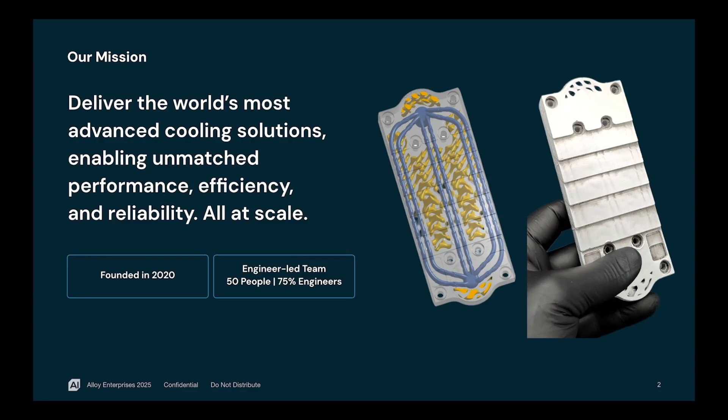We were founded in 2020. We're a 50-person team, about 75% of us are engineers, and we're based in Burlington, Massachusetts, just outside of Boston. You're more than welcome to come by if you'd like to see the things in reality, but you'll see them here today too. We basically own end-to-end design, manufacture, and delivery of parts for customers with thermal management requirements. Like a lot of people here, you guys are smart engineers doing great things, but sometimes people have problems and don't know how to solve them, and that's where they come to us, especially on the thermal management side.

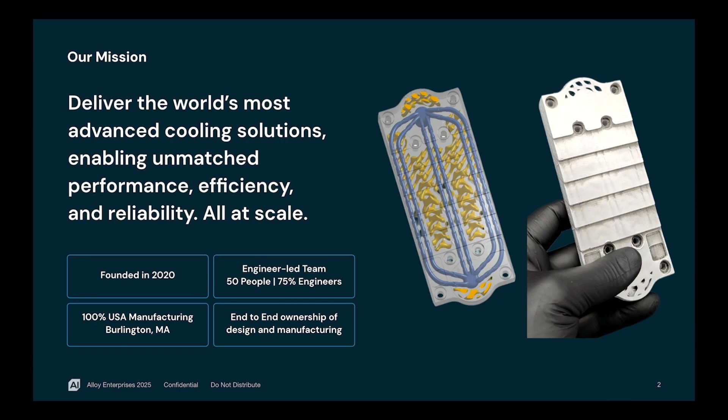There are some tools that you guys are using every day that are causing thermal management headaches for people in the industry. So specifically, I'm going to talk about thermal management with liquid cooling, single phase, with a fluid. There's a bunch of ways to deal with thermal management, but we'll talk about why we're focused on liquid cooling.

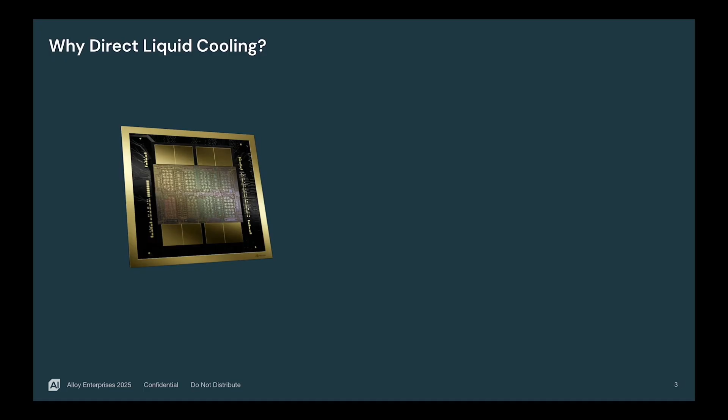The big one here is this NVIDIA Blackwell chip, the B200. For some folks, this is making my life easier in terms of emails, homework, writing essays, maybe even some talk tracks for presentations. This is an NVIDIA B200 chip, and it is powering the AI revolution we're seeing today. Trouble is, it gets hot.

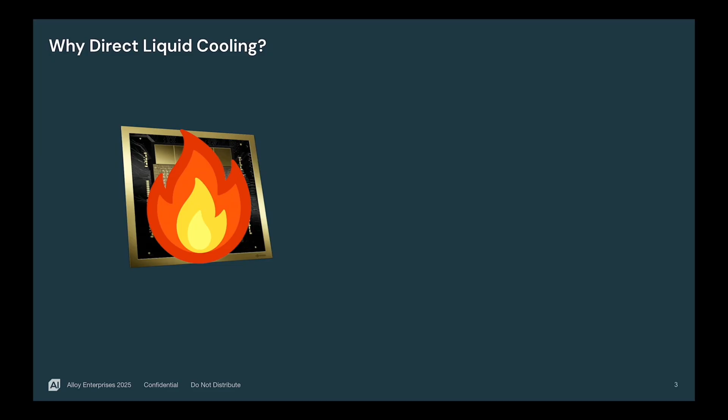If you're a chip designer at NVIDIA, I'll share some personal thoughts: I think maybe the chip industry didn't really think about all the implications of putting a lot of transistors in a very tight space. This chip is about a 50 millimeter by 50 millimeter package, and it can produce quite a lot of heat, we're talking thousands of watts. So what we need to do to mitigate that heat is cool it.

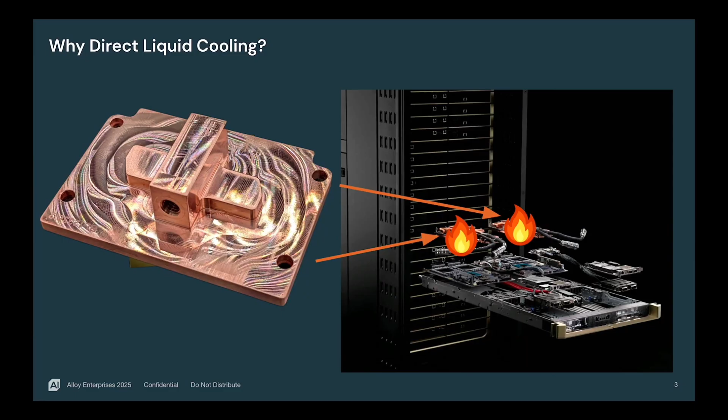One rack is part of a whole bunch of racks, and it's all getting really hot. We need to talk about this increasing demand. You're seeing about a 33% increase in compounded annual growth in terms of thermal design power, or what we call TDP.

The chip manufacturers are trying to respond to this, and I would almost say they're kind of late to the game. They're trying to produce parts that deal with this thermal problem, and everybody's kind of scrambling to figure it out.

And then more importantly, there's a whole ecosystem, not just NVIDIA. There's the people that make the motherboards, the people that make the racks, the hyperscalers. All these people are having to deal with thermal management at different levels.

And the key here is, remember we talked about that 50 millimeter by 50 millimeter package. So today's market is 1200 watts. They're talking about next gen chips up into the 3600 watt category.

I'm old, I finished college in 2000, so I still had incandescent light bulbs. There's a 100 watt light bulb, I think of those, and that's like 50 of them all kind of in one spot, this little tiny area. And just one light bulb could be pretty warm. If you're a kid in elementary school, you had a little chicken coop, and one light bulb kept all the chicks hatching and growing.

So now figure 50 of those in that small space, and then you multiply that by like 8 of those on a motherboard, and then a whole bunch in a rack. It becomes a big problem.

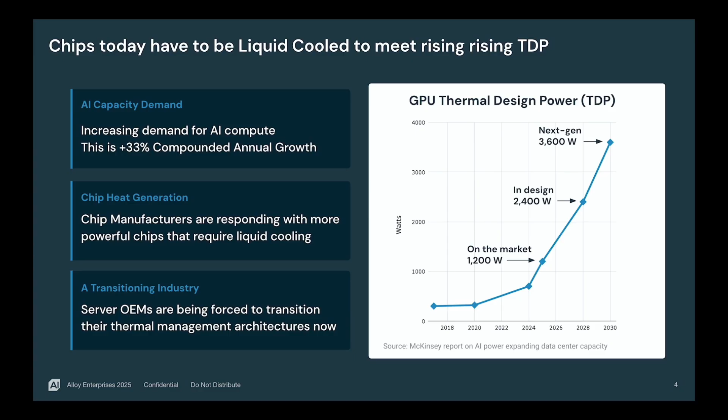So one of the things that we do, we provide value in a couple different ways. The key is, we talked about that end-to-end ownership, and we have basically a whole library of geometry that we can put into a part through the design. Then we can iterate on those parts. That would be our computational design piece, where we have some folks here. You can see we have nTopology here. We also use a number of other tools to design, and those things are actively iterating.

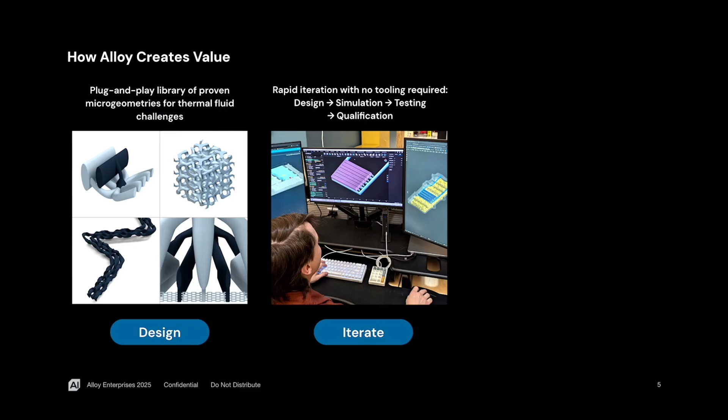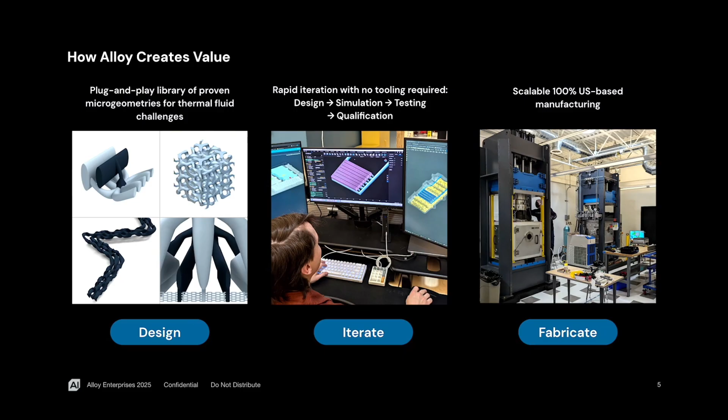And then ultimately, we have fabrication. So when you can do the design, you can iterate, and then you can fabricate so that your process is optimized. That becomes an ideal situation. And I'll talk about some of our process and how we own that on the manufacturing side.

So a couple key things though is that for our data centers, from a direct liquid cooling standpoint, we can provide thermal management with low pressure drop.

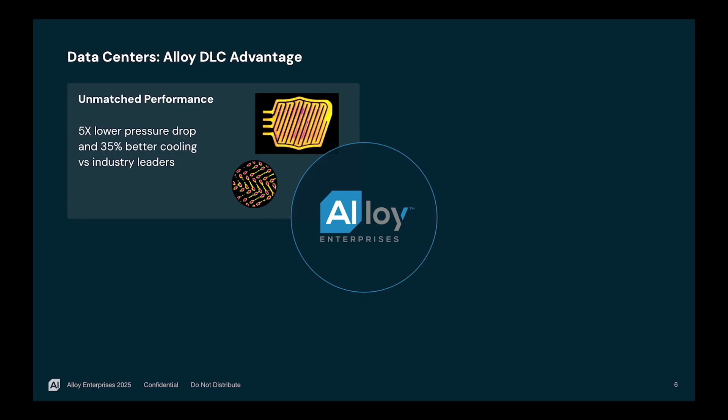And if you're not familiar with pressure drop, that is when you're passing fluid through a passageway, it kind of wants to slow down. And that slow down in flow ends up in a lower pressure. So if you have a pump, that means you have to have a bigger pump the more pressure drop you have. So if you can mitigate that, that's going to be an ideal situation, especially when you're in a space-constrained environment like a data center.

And also in that regard, smaller pumps in this case would actually save you a bunch of power. And then you start stacking up all these GPUs, that becomes an issue.

The other piece here is electronics and water generally don't mix. So we don't want those things to leak, that's a big deal, and you'd be surprised how many of these liquid cold plates actually do leak.

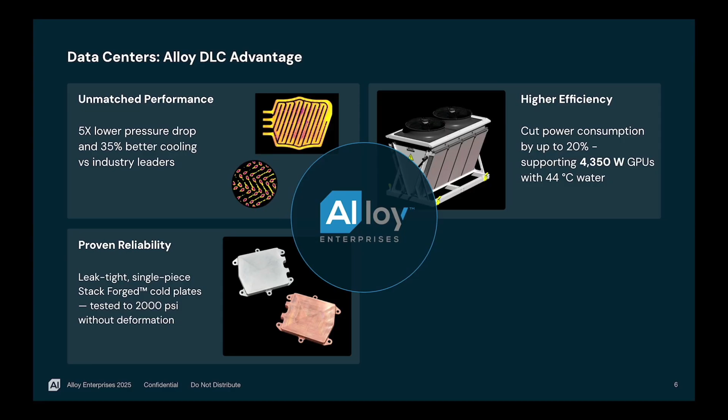The other key here is we do cooling not just in data centers, but in other industries like semiconductor test, high energy lasers, etc. And oftentimes we have to operate in either a high pressure environment or a vacuum environment.

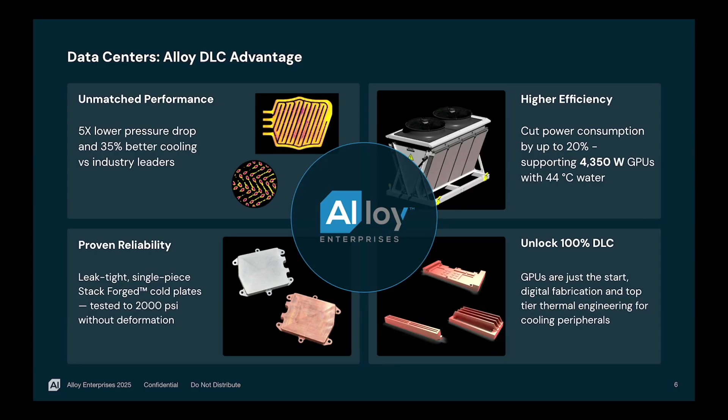And then the other piece here is that GPUs are just the start. It turns out the GPU gets hot, and if you're going to have a GPU with all this throughput, now the memory modules are getting hot, and then all the other peripherals, it just becomes a cascading problem of things. So Alloy is, we'll say lucky or well positioned, that we have a capability that can help across the space there.

So Alloy started in 2020, and the original idea was that we were kind of born out of the additive manufacturing space in Boston. And a number of founders were in companies like Formlabs and other folks.

The idea here was that additive manufacturing, specifically with lasers, is often very expensive, especially in metals. The whole idea was how can we make a low-cost, scalable process that could actually deliver large quantities of parts.

You'll see in number one there, we have a surface prep, but the key here is that we have a coil of metal, in this case aluminum 6061, and we also have a copper 110. So two materials.

The whole idea is after we surface prep that, we go through a construct process. That's basically we take that coil and we laser cut it. We also can apply an inhibition layer with basically a binder jet where we can prevent parts from sticking together, and ultimately we're going to stack those parts together and put them into the third part of the process, which is called diffusion bonding.

We're going to produce that part by adding, in a controlled environment, heat and pressure to form a solid part. So much like limestone, you get sediment layers, and over time that heat and pressure forms a limestone or a rock. In this case, we're forming bonded aluminum.

What's unique about that is that there's no filler materials. So in cold plates previously, brazing is used, where you basically machine a part and then put a solder or some different material together and put it in a vacuum brazing oven, and it forms a solid part where that filler material bonds to both sides.

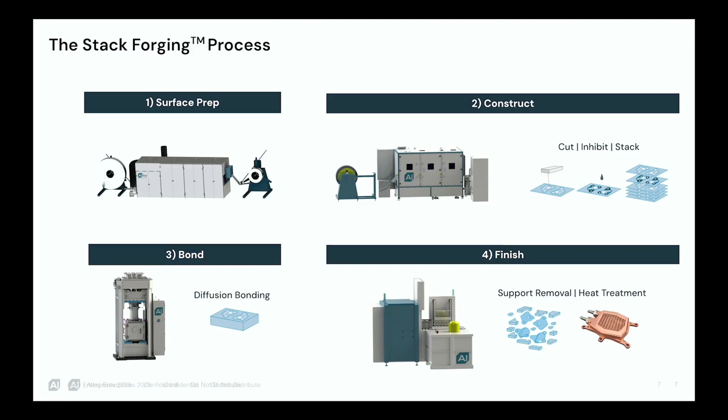We're doing this as an atomic layer, so there's no different materials in there, and often in brazed parts they're prone to leaking, especially over lots of thermal cycles. Then finally we just do a heat treat for that part. For aluminum and copper, it's a little bit different.

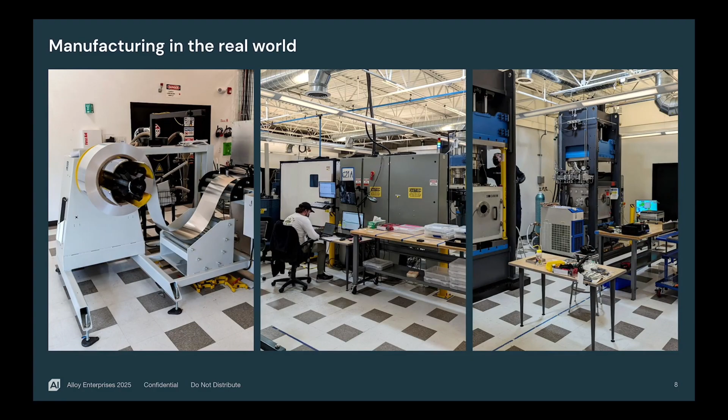So manufacturing in the real world, so we have real parts. That's our surface prep. And then this is our construct machine, and we have bonding machines. So we have five production lines on the cutting side and the bonding side, so we have plenty of throughput to do thousands of parts that you would need for a data center. And we have a whole bunch of certs.

So I'll get on to the fun stuff. That's all boring kinds of things here.

The key here is that there's a bunch of talks about AI leveraging for compute. Some of the things that go in here is that we have heat coming from all of these different parts inside of the data center, or in the server rack. We have it on the GPUs, we mentioned previously the DIMMs, now we're talking about interconnects for PCIe cards and all sorts of other stuff. Solid state drives is another big one. Things that I didn't even know get hot actually get hot, and it's a problem, especially when they're in that space-constrained environment.

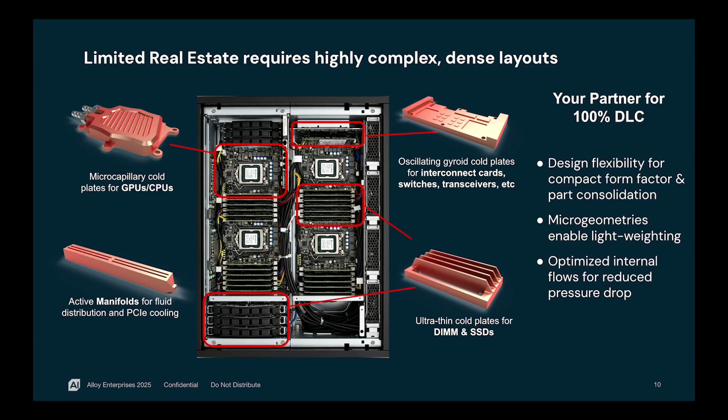Okay great, my video is playing, so that was a big question mark.

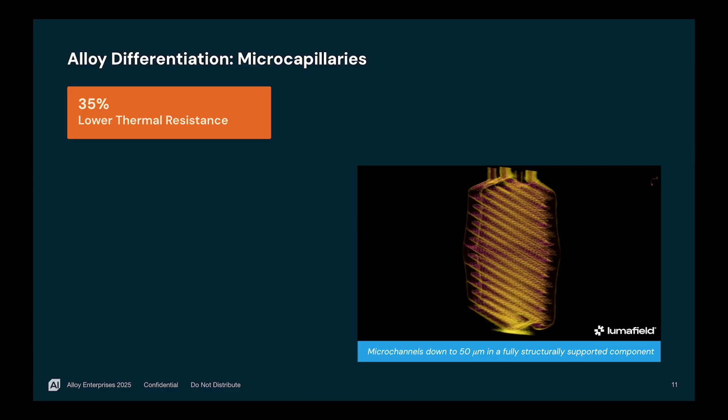Another key here is once you take that pressure drop and heat mitigation, you talk about thermal resistance, and now we have lower thermal resistance. The key here is that we're taking kind of this network or vascular type structure.

This is a CT scan of one of our parts. It's actually this aluminum part that I have here, happy to talk about that more. And then these are actually some sheets associated with the part, so it's just sheet metal. We have multiple layers with different types of geometry that we bring together, and that's where the diffusion bonding process happens to form the solid one.

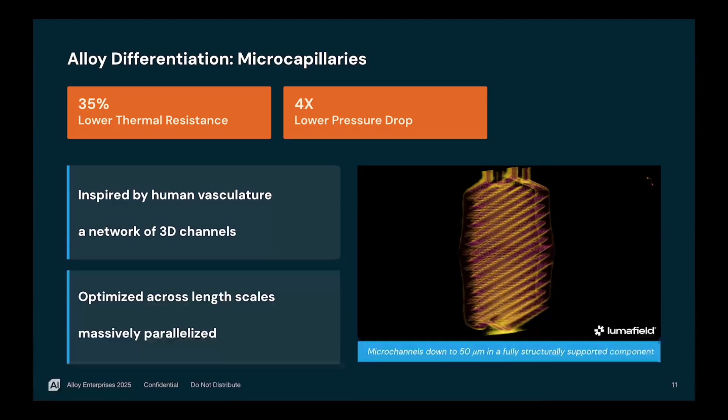What we can do with this layered approach is we can have different types of geometry of different sizes, and that's where our computational design comes in. This is optimized for different length scales. We're going to talk about two areas of computational design: how we massively parallelize the flow, and then how we actually get it to high surface area geometry, which we call capillaries. So that's kind of this next slide of this aluminum part that I showed. We kind of take a multi-tiered approach.

If you look at the center image, we basically have a series of passages that form a network together to bring flow in. The key is, you'd be surprised, as I learned especially in the defense and industrial space where I focus, we get a lot of parts that need thermal management, but they're basically made with gun drilling. They have a bunch of drilled holes, which is a pretty crude way of manufacturing, but it's very cheap, though it can often provide a lot of turbulence and different issues at those intersections.

So one of the things we can do by owning the design and manufacturing process is sometimes just making flow smooth, or making your passageways smooth. Put a nice bend, a nice flow, and that's going to reduce your pressure drop a lot, because your flow is going to be nice and laminar. We'll talk about laminar flow here in a little bit.

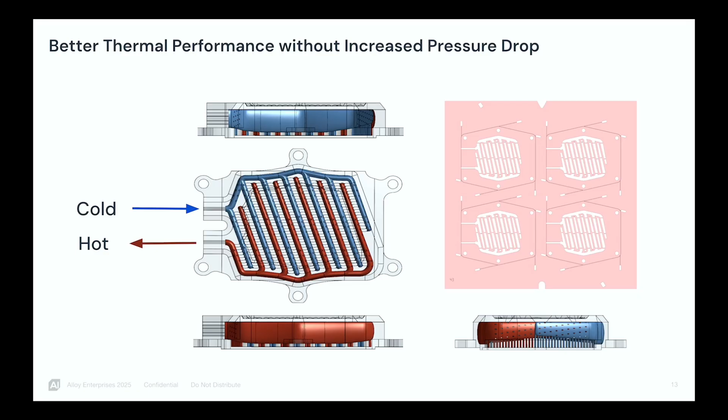The other key here is that we have microchannels. At the top, we're bringing flow in, and as we get down, we're getting smaller and smaller into that vascular structure, getting nice microchannels. So a couple of things that we have are microchannels or microcapillaries.

The idea here is that with our process, we just do laser cutting of sheet metal. If you've had any parts made, or really any kind of thing you've seen, that's all sheet metal and it's laser cut. That's a pretty common thing.

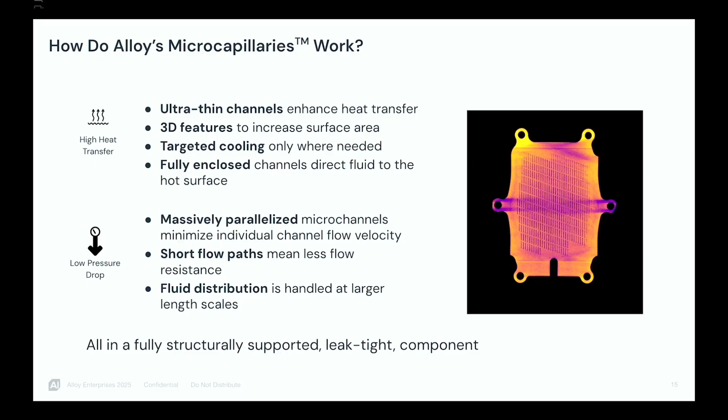So what we can do is actually just do single line curve cuts in our sheet metal to provide a microchannel. Depending on the material, for aluminum it's 180 microns as our minimum channel width, and for copper it's about 50 microns. So we can make these ultra-fine passages where the flow can come through.

But oftentimes when you have flow, especially in a narrow channel, it's going to want to slow down. So if I had a long microcapillary, that's going to cause a lot of pressure drop. In this scenario, we actually just want nice thin and short channels, and by bringing in that network of flow, we're massively parallelizing it.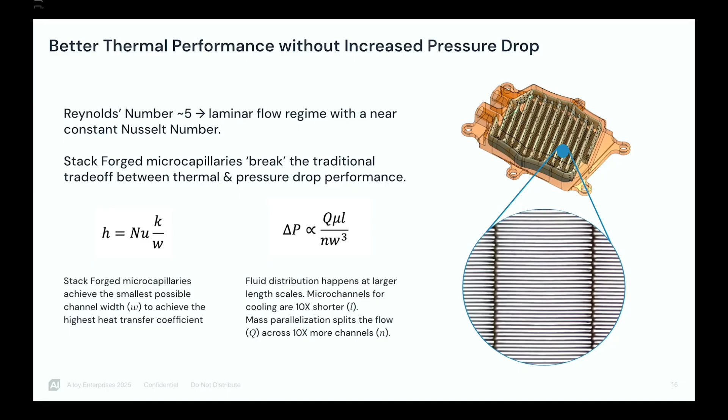You're going to produce something that looks a lot like this. We basically bring the flow in, and instead of having long microchannels that might be 25, 50, 100 millimeters long, we have microchannels that are about 5 millimeters. When we do that, we get nice laminar flow over that part, and we still get a lot of surface area.

The other thing here is that from a computational design standpoint, we showed a lot of fancy things, but oftentimes all I need to know is where's the heat, and I'm going to put as many microchannels as I possibly can in that space. That would be like the first iteration.

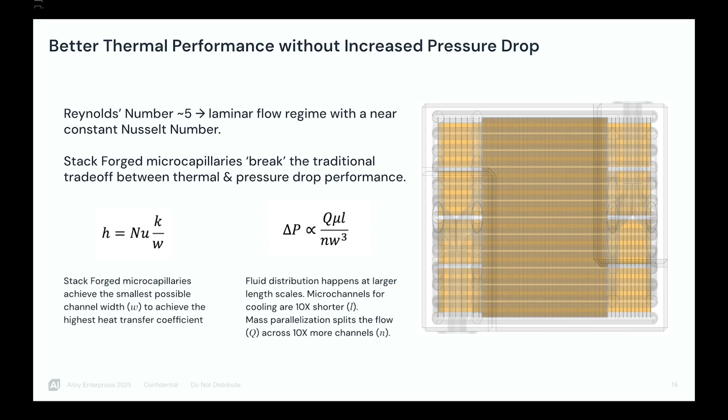Then, depending on where my ins and outs are, I'm going to tailor those microchannels to maybe avoid hot spots or provide a bit more density where I'm not getting as much flow. Sometimes on the ins and outs we don't get to control that, so you have to deal with the cards you're left with, and that's where our real computational design comes from.

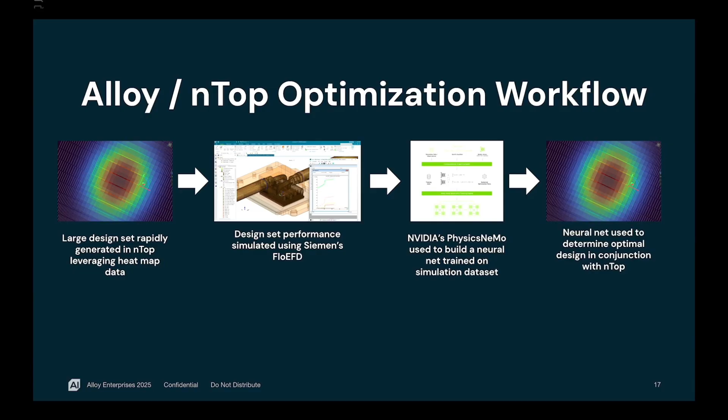That's kind of where things like nTop come in, where you can use spatially varying fields generated from simulation to modify the geometry there. Then you can use other tools like Siemens FloEFD, which we use for the CFD side. We can even tie those things into neural nets and other tools to tailor that microchannel geometry.